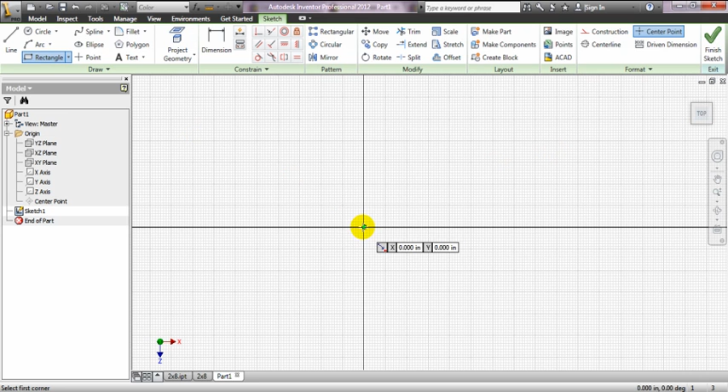So I'm going to do it from the XZ plane, build from the ground up, and hit Create Sketch, and flip this right side up. I'm going to grab my rectangle tool and lock right onto the middle origin here with a green dot and click. I'm just going to come up here to the top right, and make this a 1x1.

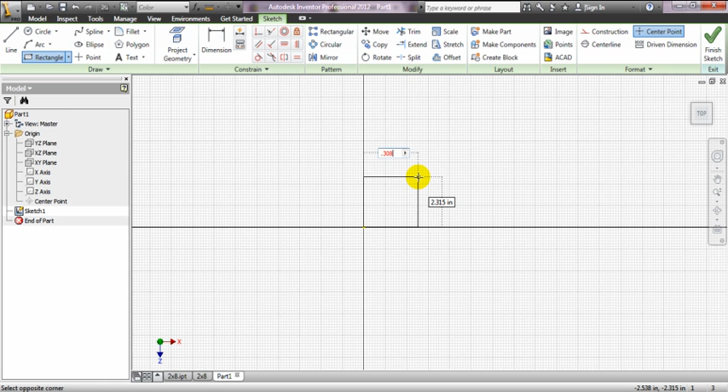And we're going to pattern this so that it creates over and over again. Now what I got for the size of my 1x1 square is 0.308. So that's what I'm going to do: 0.308. So now I've got a 0.308 by 0.308 square, and that's basically a 1x1 if we had one cylinder on top.

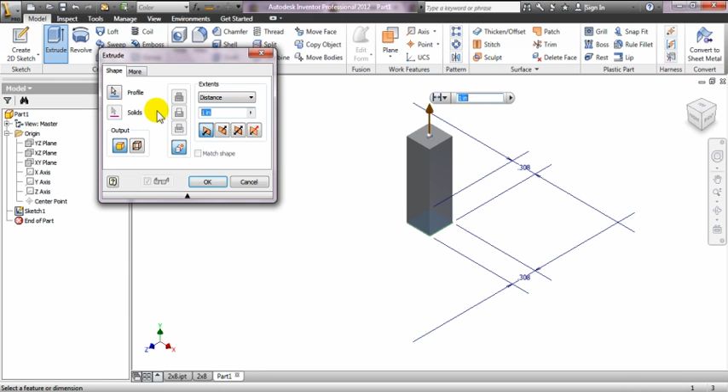So I'm going to go ahead and go to Finish Sketch, go to Isometric View, and extrude this up. The extrude height that I got was 0.125, or at least something close to it. Your numbers may be slightly different from this, but they should be pretty close. Hit OK.

And now I'm going to make another sketch on the top. I'm going to zoom in here a little bit, and I want to make it right in the middle. There's a couple of ways we can do this. We can dimension the circle right in the middle, or we can try and line it up. So if I grab my circle tool, you're actually going to see these dotted lines showing up, and then there's the center. This is the easiest way to do it, locking on so that there's a dotted line here and a dotted line converging in this direction as well.

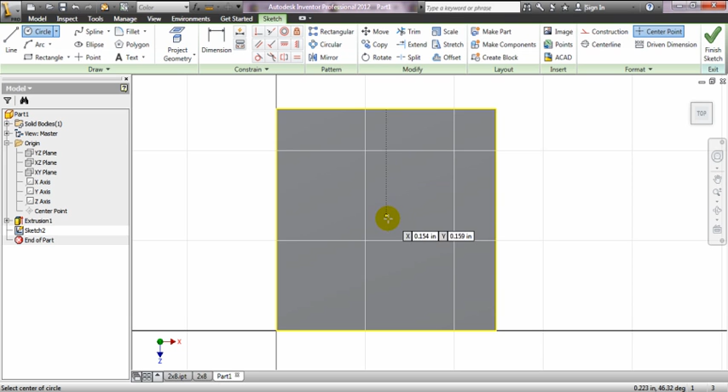Another way we can get more precise is if I grab my line tool and lock onto this corner and come across to this corner. So I've locked on and made a line diagonally across, and grab my circle tool. I can actually snap onto the middle of this line. It'll lock on green, and that way I know I'm right in the middle. So this is the middle of my line, is right when I get a green dot, right in the middle of this line. So I'm going to lock on green right there.

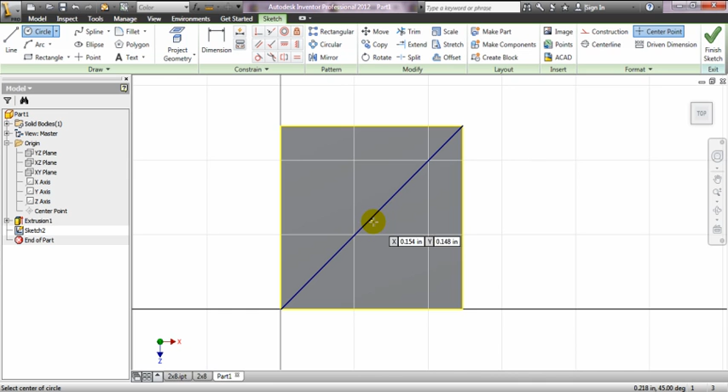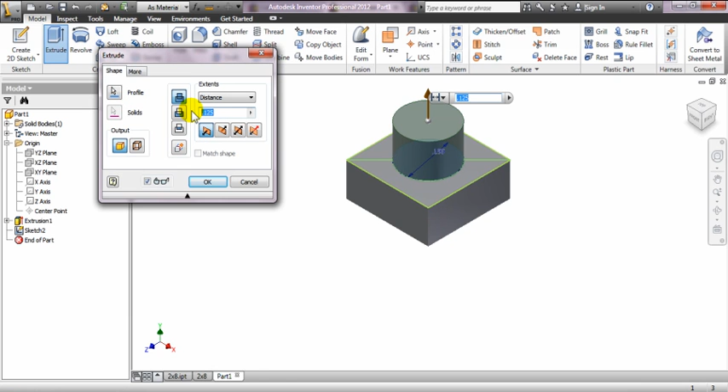Maybe, yeah, right there. And I'm going to make this circle the correct diameter, which I got 0.19. You should probably have something close to that. I'm going to finish the sketch, hit extrude, and extrude the circle. The height of the circle I got 0.077. Hit OK. Now we're very close to the completion of our Lego piece.

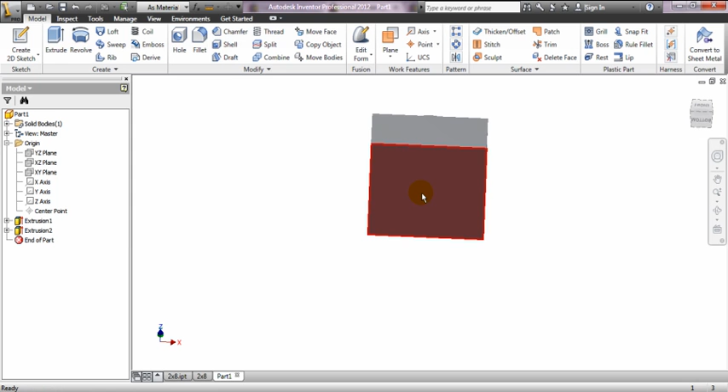We do need to hollow this out, and we are going to hollow it out once we get to the 2x8, because I do want to duplicate this a lot first. But at this point we could shell this and it would create the thing that we want. So I'm going to hit shell, but we're going to delete this in a moment.

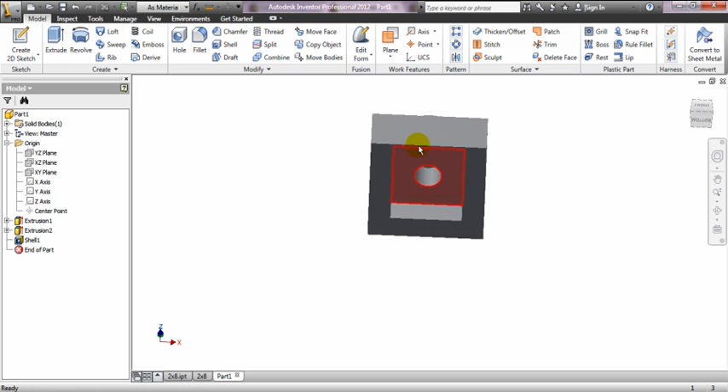And I'm going to remove this face, so I'll click on the bottom. My thickness of my walls, that is the outer walls of my Lego piece, I got 0.059. Hit OK, and check it out. Not only do I have the walls created, but I've also hollowed this out too, so I have that little circle down there. So this would be a good 1x1 piece that's completed, but I don't want the shell there yet.

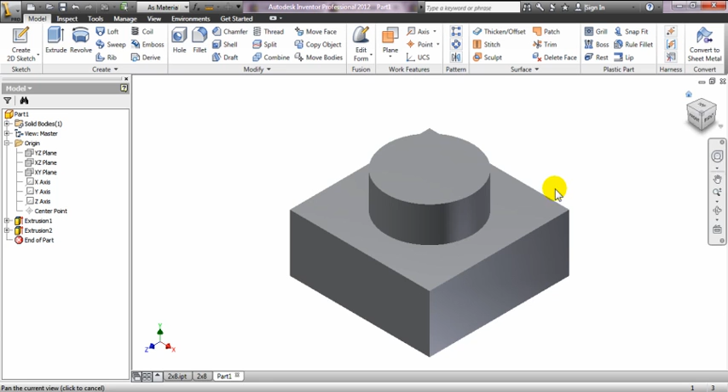So I'm going to delete the shell. And I'm going to do a couple of things to this. I am going to first of all mirror this. So if I hit mirror and click on this feature and this feature and go to mirror plane, I can click right on this face here, and I now have a 1x2.

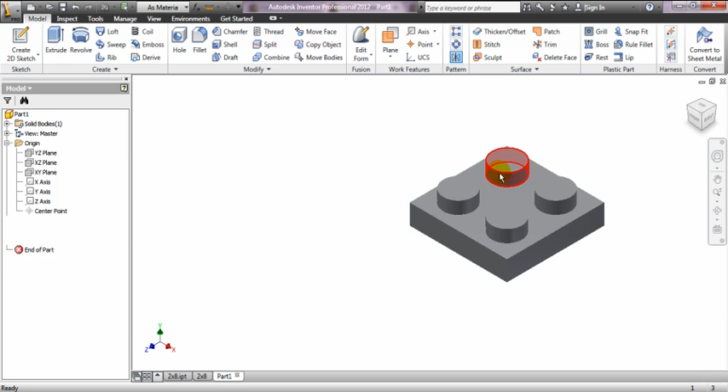Very easy. I can hit mirror again, click my features, which actually if I just click this one over here, it'll get everything I've done so far. Hit mirror plane, click this face or the backside face, and I now have a 2 by 2. And if I hit mirror again and click this, selecting everything I've done so far, and hit mirror plane, I can mirror it here again and hit OK.

And if I hit mirror again, click this, the mirror plane, click this face, and I actually now have a 2 by 8. It's completed. So it's as easy as that. It's starting out with one piece, and then you can mirror it over and over again. Now another thing I can do, I'm going to delete all these mirrors.

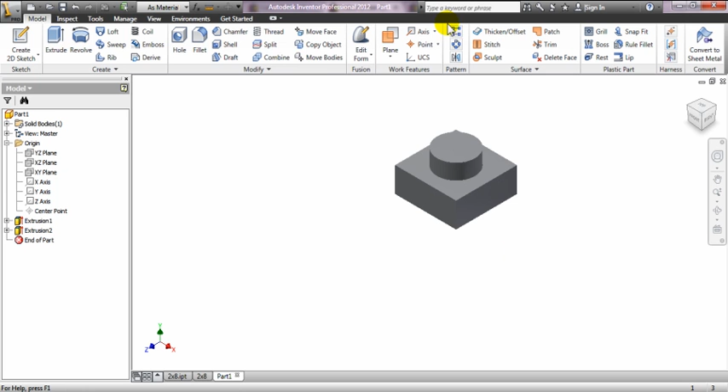I can do a rectangular pattern to do it all in one. So for my rectangular pattern, I want to copy this feature and this feature, and I want to go to direction 1. I'm going to click on this line right here so that it goes in this direction, and I want it to go 0.308 because that is exactly how big the square is, and look at that, it's right up against it. I want this to happen 8 times.

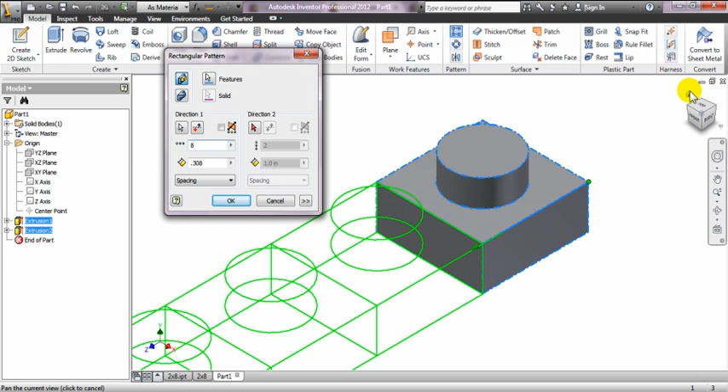Now I'm going to go to direction 2, click on this line right here. It's going this way, which is fine, we could bring it in either way. I want this to go 0.308 as well, and I'm going to do 2 times. Hit OK - that's one step.

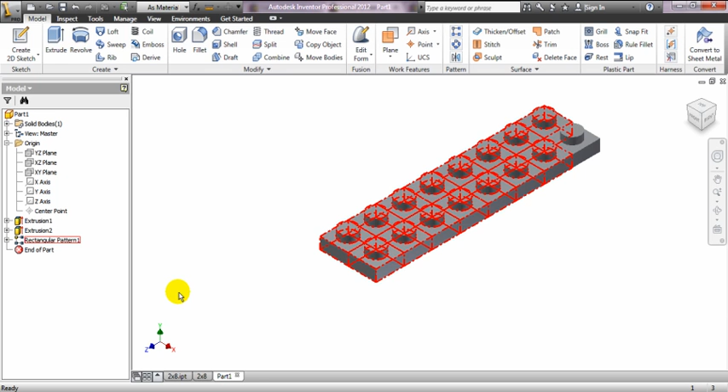One rectangular pattern. The other way, we did mirror, mirror, mirror, mirror, and that works too, but this is just faster. We've only done 3 features so far, and we have most of this thing created now. So pretty cool, now we have a 2 by 8.

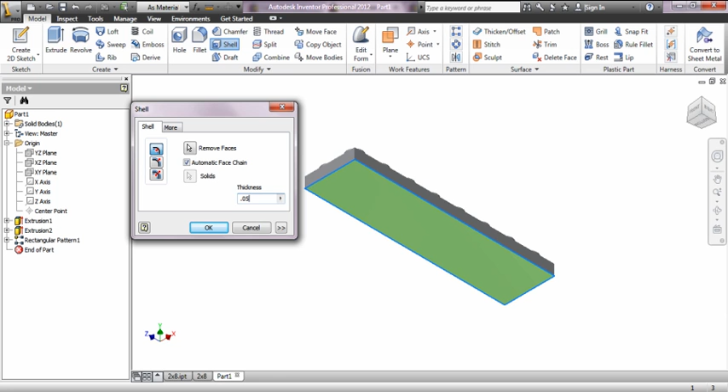Now I'm going to go to the bottom. I'm going to go to shell, and I'm going to remove this face, bottom, and I'm going to go to thickness - I think I said 0.059. Hit OK, look at that - we got all those little holes down there, so we didn't even have to feature those out.

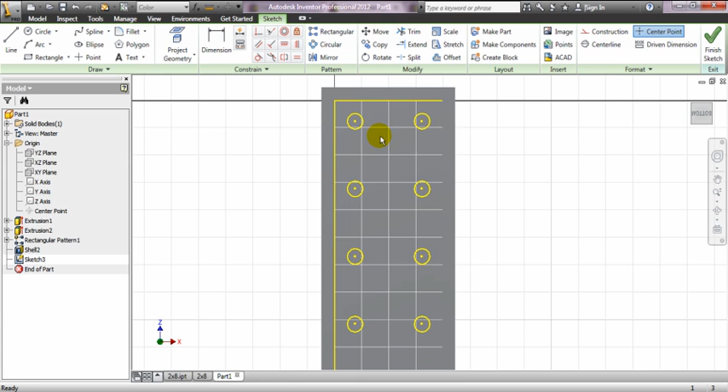But we do need those cylinders in the middle, so here's how we do that. I'm going to make a sketch right here, and I want my circle to be right in the middle here. So I'm going to do that same thing with the line - grab my line tool, lock onto the middle of the circle right here, and bring it down diagonally until I lock onto this circle.

That's good. Now I'm going to grab my circle tool, and lock onto the middle of this line once it turns green, which is right there. So this bottom cylinder, 0.254 is what I got from the dial calipers. And there's an inner circle as well, so I'm going to make that one too, and that is 0.188. So there's my circle there.

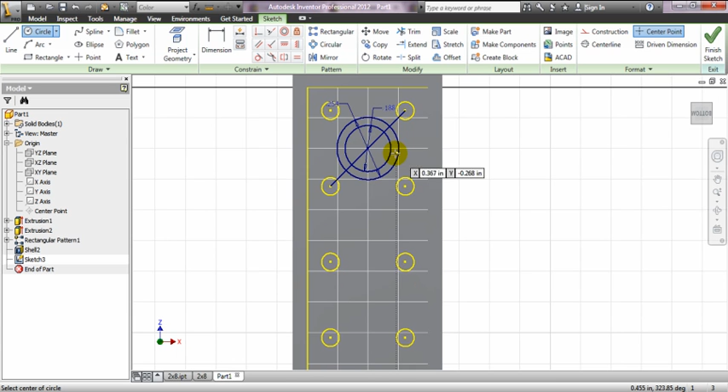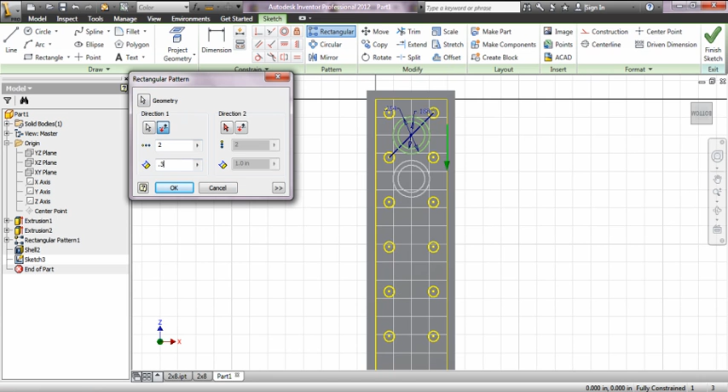I can do this in Sketch or out of Sketch. I could rectangular pattern this circle and this circle. Direction 1, and choose this line - but look, it's going in the wrong direction, so I want to flip that. I want it to be 0.308 because that's how far away my individual squares are from each other. Look at that, right in the middle. And how many times do I want this to happen? Well, I want to do 1, 2, 3, 4, 5, 6, 7 times, so I'm going to do 7. And look at that, we've got our circles already created.

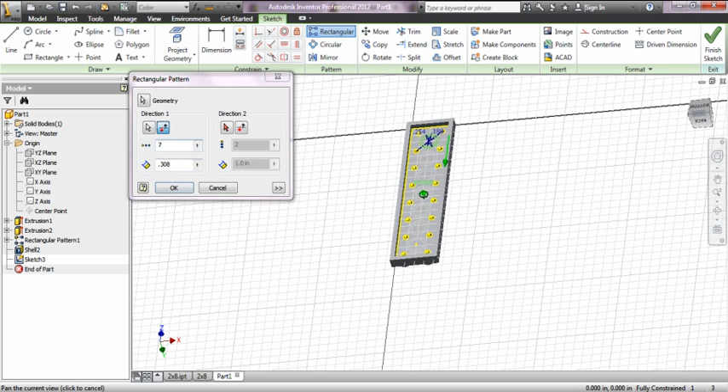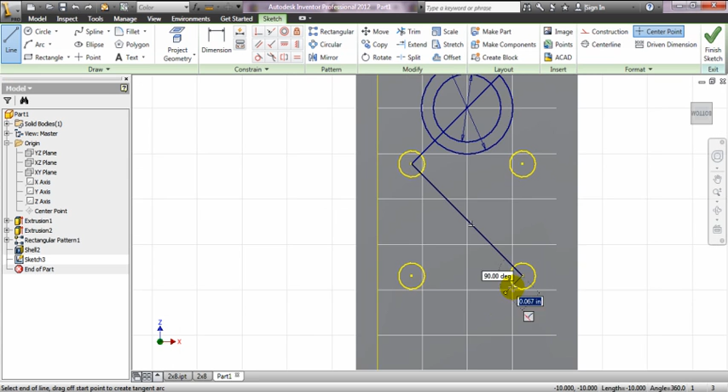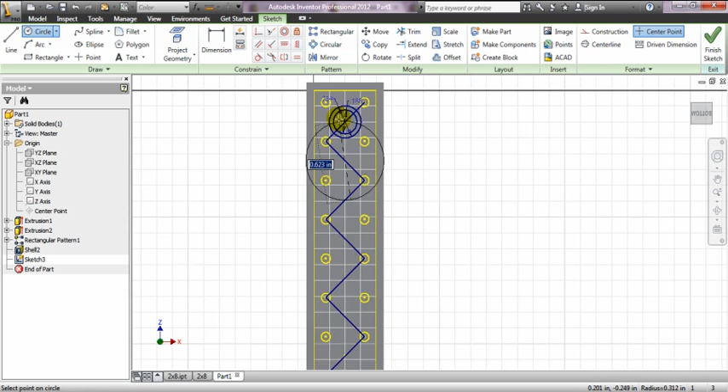So I can extrude all these up to a specific height. I could also grab my line tool and just draw diagonal lines from here to here, and from here to here, and just keep zigzagging, making sure I'm locking onto the middles of the circles the whole time. And I can grab my circle tool and just draw all the circles manually in - this one's going to be 0.254, and the other one is going to be 0.188, and I can just keep drawing circles. So that's another way we can do it.

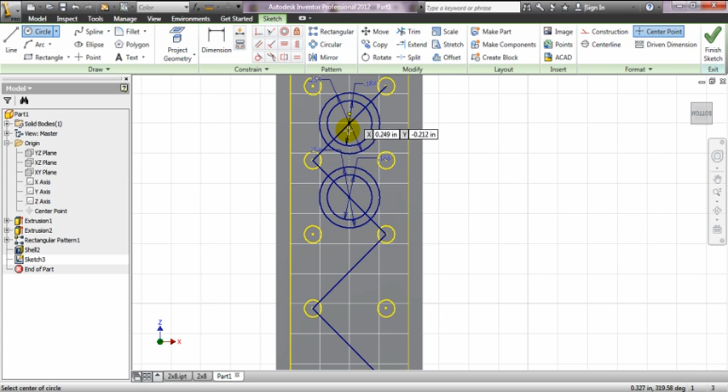Rectangular pattern is probably faster. Now the way I like to do it is just make one circle here - let's pretend we didn't do all the zigzag and we just have one circle. I'm going to go to Finish Sketch, turn this slightly, and go to Extrude, and I want to extrude just this outer ring right here. I want it to extrude so that this is just as tall as this outer wall, so I'm going to go to Distance and choose To instead.

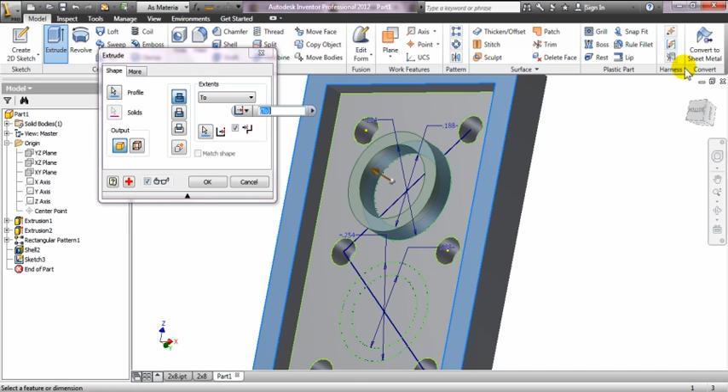That's going to raise that up until it's extruded right up to that wall - it's going to be in line with it, see? So I just want these to be at the perfect same place. Hit OK. So now I've got one ring right there.

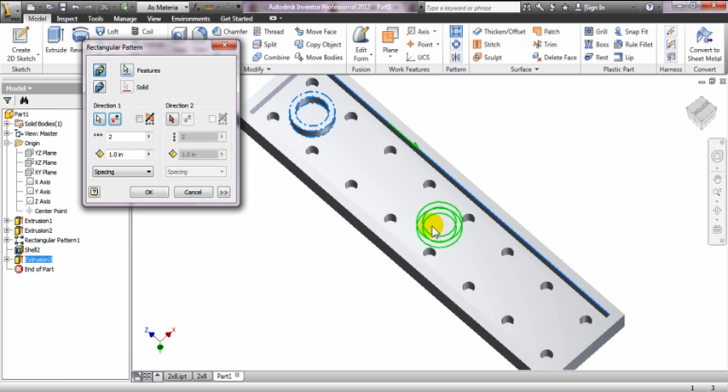So I'm going to go to Rectangular Pattern - this is the way I like to do it, just make one and then pattern it. I'm going to click this, go to Direction 1, click on this line. It is now going down, but I do want this to happen 7 times, and I want it to go 0.308 distance. And that looks right - they're right in the middle of everything. It's 0.308 because that's how far away these are from each other, so that's how far these are going to be away from each other.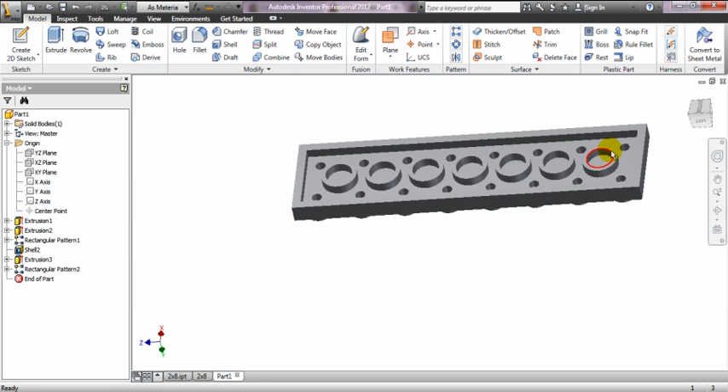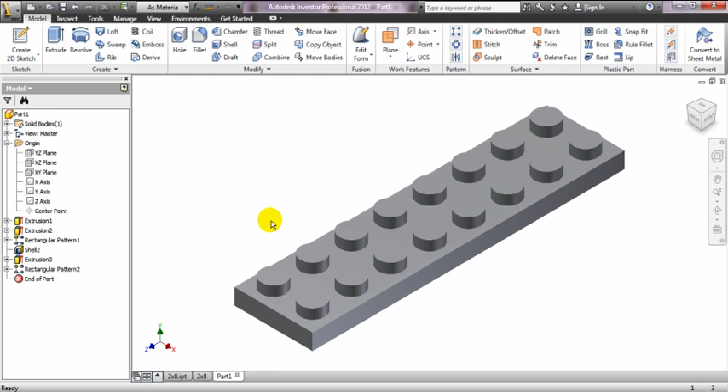Hit OK, and we have a 2x8, and it didn't take too much time. In fact, I showed you a couple of different ways that you could accomplish this. And look how many features I have - 1, 2, 3, 4, 5, 6 features to make this. You could probably even do it in less than that, maybe, if you sketched everything all at once. But anyway, that is how you create a 2x8, and with that, you should be able to figure out how to make the other smaller pieces pretty quickly based on this. So go ahead and save this.